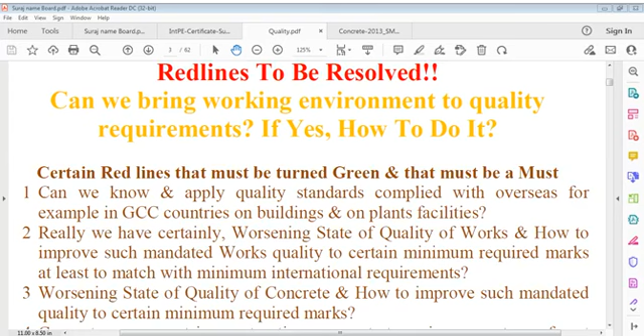And we know concrete component in constructions amounts to major percentage of cost, and therefore it becomes incumbent on us to care about quality of such component. Concrete is very costly material in comparison to other materials. Concrete is very costly, but we should not forget it is in long run very cheap.

Concrete can work up to hundreds of years and more, depending on how we do it, how we preserve it. And concrete means it is our, you can say, like a kid. If I produce concrete, I produce it for many decades. It's not today I produce, tomorrow I say it's over. It's not an electronic machine. It's not a computer. It's not another machine or some consumable that tomorrow I have to buy again and consume it.

It is concrete that shall work for me even after my death. Of course, it shall not work for me, but I am saying in my place, whoever is there, I should be there at that time, even after my death. Maybe my soul comes and sees this was my building, I did it. It is still existing. It can happen. There's another part, I'm just trying to communicate that you have to be serious about that. Concrete, only material in physical world which is longest living.

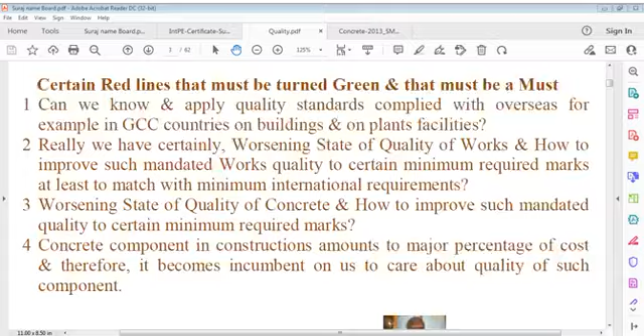So what I say, concrete component in constructions amounts to a major percentage of cost, and therefore it becomes incumbent on us to care about it out of common and professional understanding. Why do we have no seriousness in this regard? We have to invite seriousness. We have to be very serious about such an issue of concrete material,

because it is a resource. It's a manufactured resource based on available natural resources that we extract from earth, from the lithosphere. We have to consider the value of this resource.

Rock is not available just in 1 year or 2 years. Sedimentary rocks are produced in many decades. Metamorphic rocks are also produced in many decades. And igneous rocks, it's volcano. We have to respect these materials, that we use these materials for only a few decades, which have been produced based on many decades.

Just like we did not respect petroleum, we did not respect fossil fuels. We should not make this mistake with these materials.

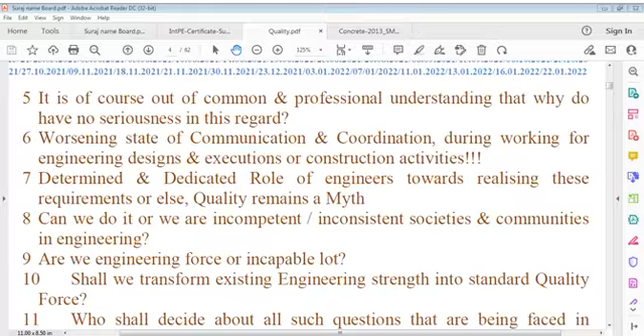I'll stop here on this talk because already 40 minutes have gone and I must have some opportunity to talk about yesterday's activity. We were talking about some concrete, and I think in addition to this document as I showed to you, this was about a nuclear power plant concrete structure, and I was on this page last time.

It was said, I just repeat that, it was NUPEC - it stands for this NRC model, which consists of a one-fourth scale model of a pre-stressed concrete containment vessel, that is PCCV, of an actual nuclear power plant in Japan, one of four units comprising.

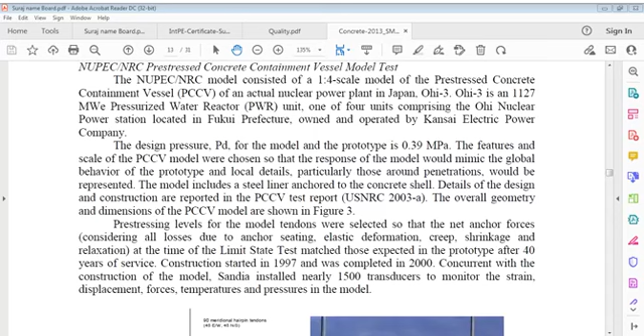Now, the design pressure for the model and for the prototype is 0.39 MPa. Features and scale of the PCCV model were chosen so that the response of the model would mimic the global behavior of the prototype, and local details, particularly those around penetrations, would be represented.

The model includes a steel liner anchored to the concrete shell. Details of design and construction are reported in the test report. Overall geometry...

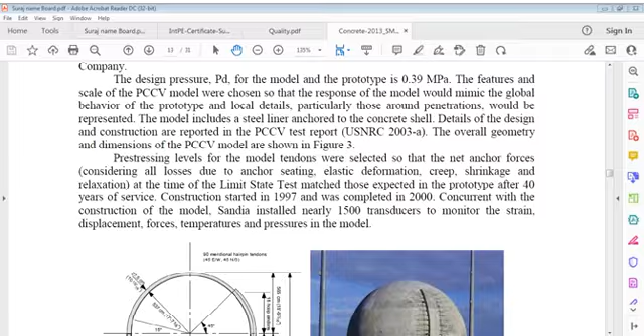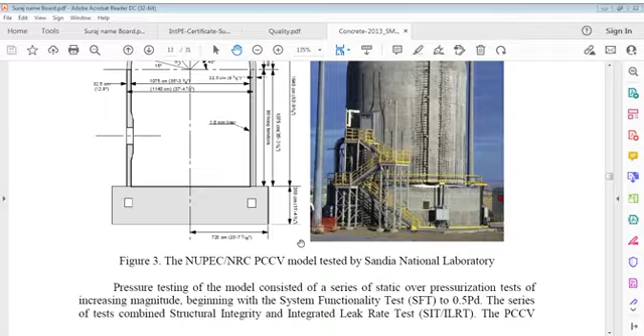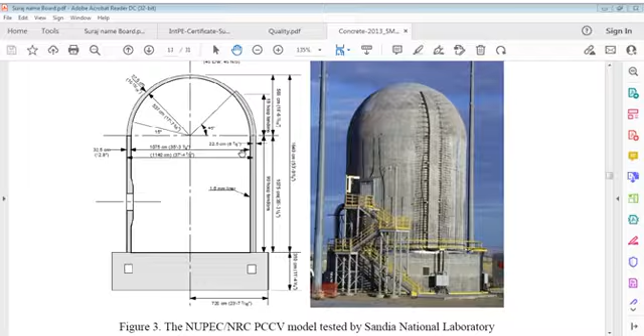It is 720 centimeters here, and 350 centimeters depth here, and it is 1640 centimeters - 16.4 meters is this vertical height, and this curve shape is 5.65 meters. Of course this is quite heavy, and the wall thickness is 325 mm. Internal diameter is 1075 centimeters, this means 10.75 meters. This is titled Models Tested by Sandia National Laboratory.

Pre-stressing levels for model tendons were selected so that net anchor forces, considering all losses due to anchor seating, elastic deformation, creep, shrinkage, and relaxation at the time of the limit state test, match those expected in the prototype after 40 years of service. Construction started in 1997 and was completed in 2000.

Concurrent with construction of the model, Sandia installed nearly 1,500 transducers to monitor strain, displacement, and forces.

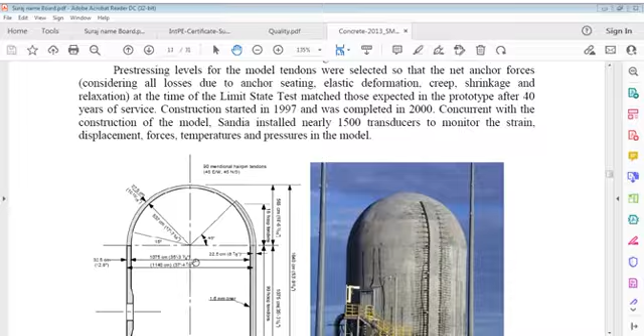Pressure testing of the model consisted of a series of static over-pressurization tests of increasing magnitude, beginning with a system functionality test to 0.5 PD, followed by a series of tests combining structural integrity and integrated leak testing.

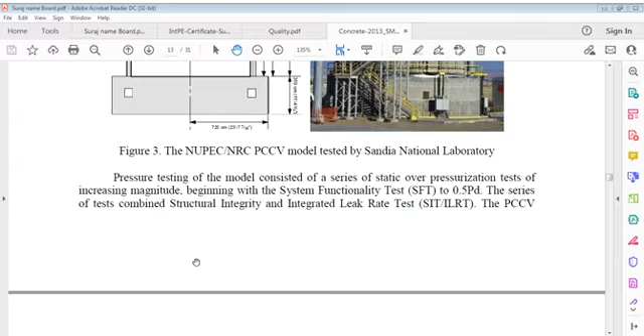The structural integrity combined test means the model was pressurized to 1.125 PD, and after holding pressure for approximately 1 hour, the model was depressurized to 0.9 PD and held at that pressure for 24 hours. During this period, a leak rate less than 0.1% mass per day was calculated, essentially demonstrating that the model was leak tight.

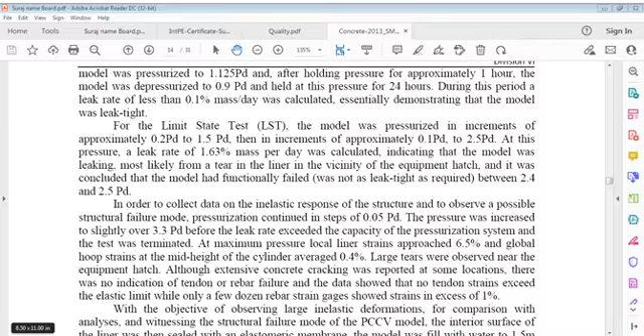For the limit state test, the model was pressurized in increments of approximately 0.2 PD up to 1.5 PD, then in increments of approximately 0.1 PD up to 2.5 PD. At this pressure, a leak rate of 1.63% mass per day was calculated.

This 1.63% mass per day leak rate indicated that the model was leaking, most likely from a tear in the liner in the vicinity of the equipment hatch. It was concluded that the model had functionally failed, not remaining as leak tight as required, between 2.4 and 2.5 PD.

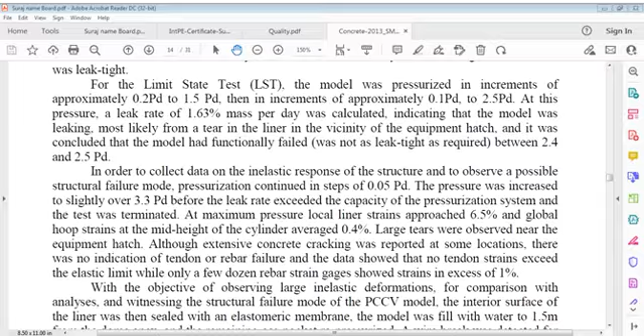In order to collect data on the inelastic response of the structure and observe a possible structural failure mode, pressurization continued in steps of 0.05 PD. Pressure was increased to slightly over 3.3 PD before the leak rate exceeded the capacity of the pressurization system and the test was terminated.

At maximum pressure, local liner strains approached 6.5%, and global hoop strains at mid-height of the cylinder averaged 0.4%. Large tears were observed near the equipment hatch.

Extensive concrete cracking was reported at some locations. There was no indication of tendon or rebar failure, and data showed that no tendon strains exceeded the elastic limit, while only a few dozen rebar strain gauges showed strains in excess of 1%.

With the objective of observing large inelastic deformations, for comparison with analysis and witnessing the structural failure mode of the PCCV model, the interior surface of the liner was then sealed with an elastomeric membrane. The model was filled with water to 1.5 meters from the dome apex and the remaining gas pocket was repressurized.

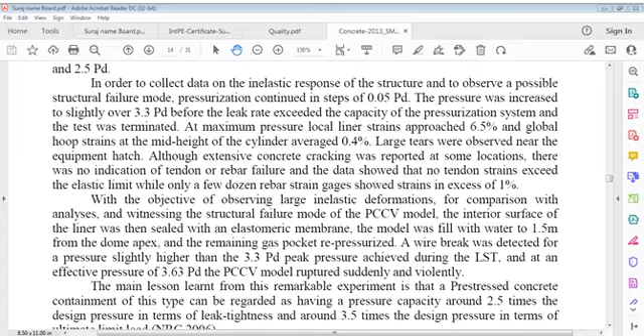The main lesson learned from this remarkable experiment is that a pre-stressed concrete containment of this type can be regarded as having a pressure capacity around 2.5 times design pressure in terms of leak tightness, and around 3.5 times design pressure in terms of ultimate limit load. This is NRC 2006.

So, as this source says, the main lesson learned from this remarkable experiment is that a pre-stressed concrete containment of this type can be regarded as having a pressure capacity around 2.5 times design pressure in terms of leak tightness, and around 3.5 times design pressure in terms of ultimate limit load.

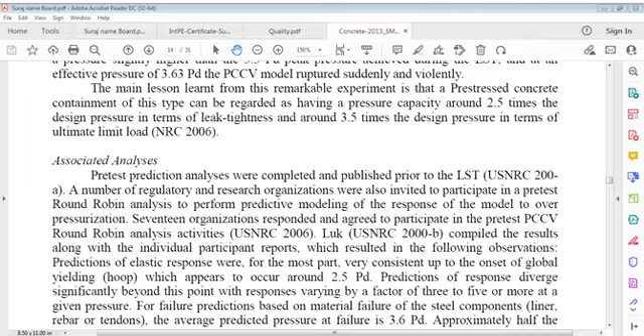This is associated with analysis. Pre-test prediction analyses were also completed and published. A number of regulatory and research organizations were invited to participate in a pre-test round robin analysis to perform predictive modeling of the response of the model to over-pressurization. 17 organizations responded and agreed to participate in this pre-test round robin analysis activity.

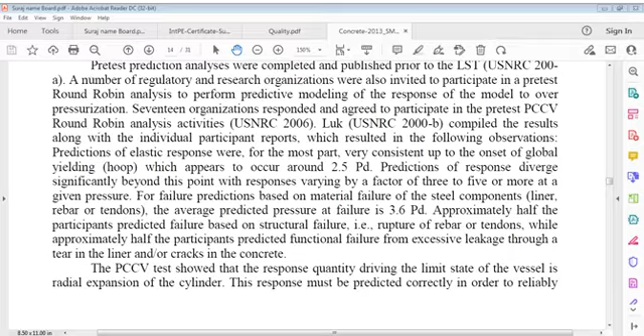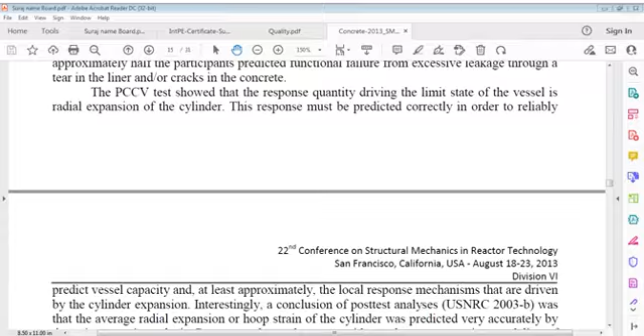The PCCV test showed that the response quantity driving the limit state of the vessel is radial expansion of the cylinder. This response must be predicted correctly in order to approximate the local response mechanisms that are driven by cylinder expansion.

Interestingly, a conclusion of the post-test analysis was that average radial expansion, or hoop strain, of the cylinder was predicted very accurately by axisymmetric analysis. Axisymmetric post-test analysis also gave evidence that appropriate modeling of tendon friction behavior is crucial.

A detailed analysis led to the conclusion that, considering both the effects of discrete cracks and elevated local strains, a liner tear could have been predicted to nearly occur as early as 2.8 PD.

One question which remained following the PCCV test was how temperature loading might have affected the results of the test. In an attempt to answer this question, the Nuclear Energy Agency of the OECD recognized it as an international standard problem and sponsored analysis toward its resolution. 11 organizations, including several participants in the pre-test round robin, participated in the ISP, the results of which are reported by this document.

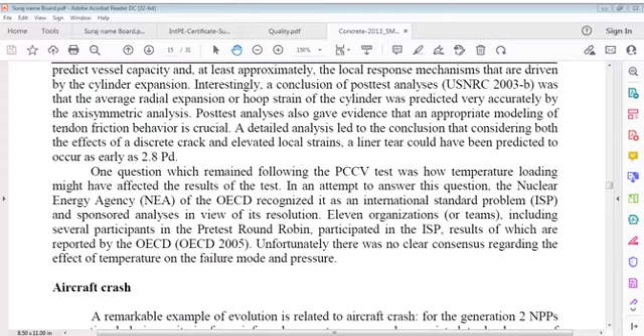Unfortunately... the round robin analysis aimed to perform modeling of the response of the model to over-pressurization. 17 organizations responded and agreed to participate, and the results, along with individual participant reports, led to the following observations.

Predictions of elastic response were for the most part very consistent up to the onset of global yielding hoop strain, which appears to occur around 2.5 PD. Predictions of response diverge significantly beyond this point, with responses varying by a factor of 3 to 5 or more at a given pressure.

For failure predictions based on material failure of steel components—liner, rebar, or tendons—the average predicted pressure at failure is 3.6 PD. Approximately half of participants predicted failure based on structural failure, rupture of rebar or tendons, while approximately half predicted functional failure.

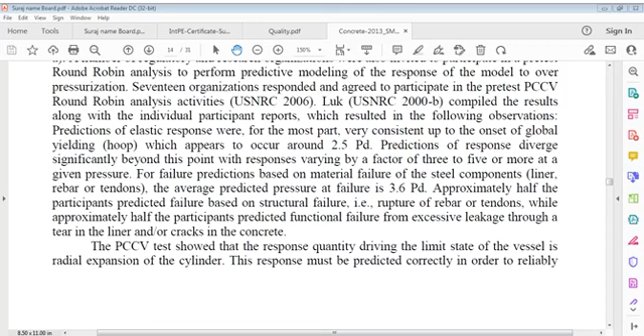A remarkable example of evolution is related to aircraft crash design for generation 2 NPPs conventional design criteria for reinforced concrete were used, associated with load cases of business or military aircraft crashes.

After the September 11, 2001 attack, it was recognized that a malevolent commercial aircraft crash should be considered in safety assessment of NPPs and taken into account in designs of NPPs to be built in future. However, it is also recognized that when dealing with extreme loads such as generated by commercial aircraft crashes, more realistic criteria should be taken into account according to ultimate capacities.

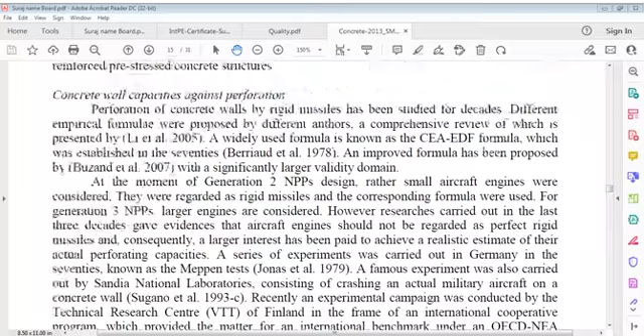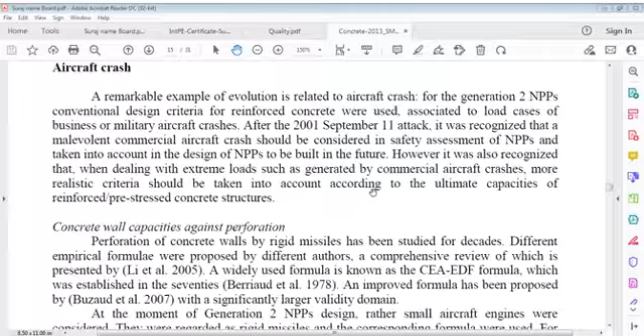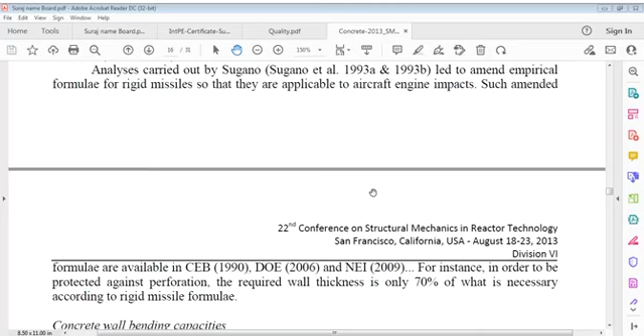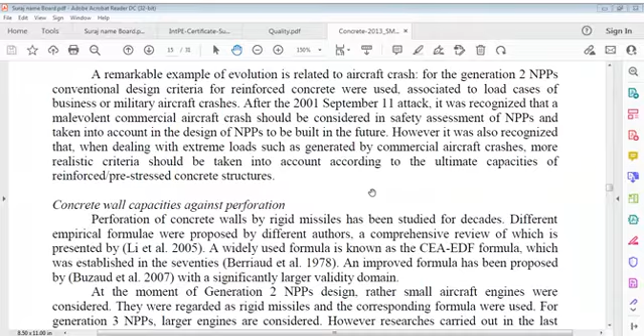Let us go on. I think I missed it. This is the... let me see, just in the piece. It's gone somewhere here. I think it's stuck somewhere. Generation 2 NPPs, this was also done.

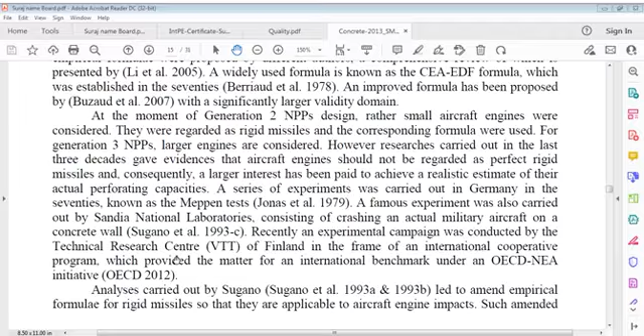Concrete wall capacities against perforation: formulas established in this range have been proposed, and generation 2 is also considered here. This recent cooperative program provided material for an international benchmark. Analysis carried out by Sugano led to amended empirical formulas for rigid missiles.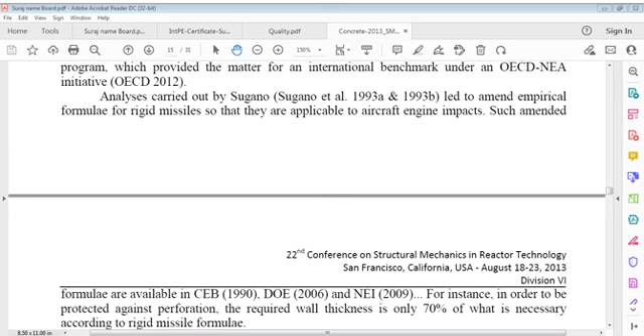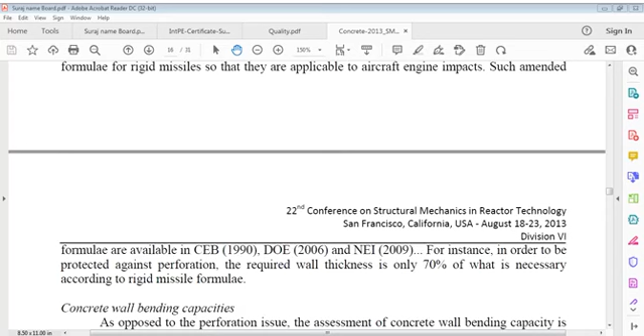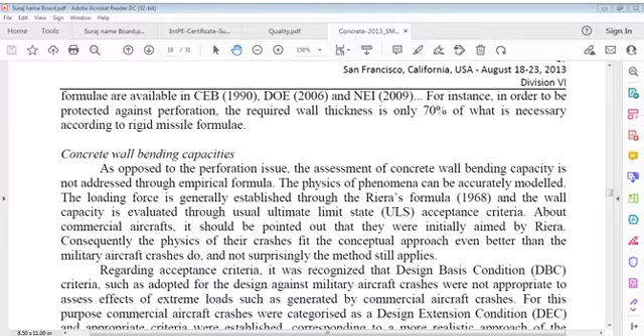Analysis carried out by Sugano led to amended empirical formulas for rigid missiles so that they are applicable to aircraft engine impacts. Such amended formulas are available, and for instance, in order to be protected against perforation, the required wall thickness is only 70% of what is necessary according to the rigid missile formula.

Concrete wall bending capacity: as opposed to the perforation issue, assessment of concrete wall bending capacity is not addressed through empirical formula. The physics of the phenomena can be accurately modeled. Loading force is generally established through Riera's formula, and wall capacity is evaluated through usual ultimate limit state acceptance criteria.

About commercial aircraft, it should be pointed out that they were initially aimed at by Riera. Consequently, the physics of their crashes follows a conceptual approach even better than military aircraft crashes do, and not surprisingly, the method still applies.

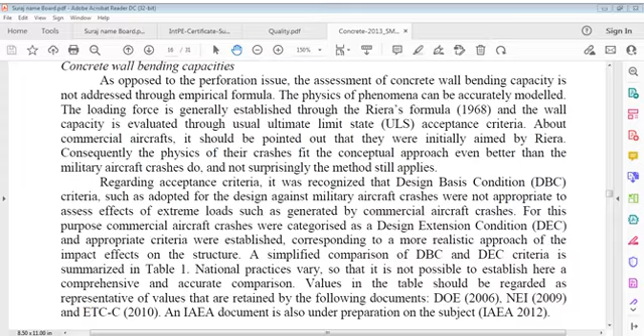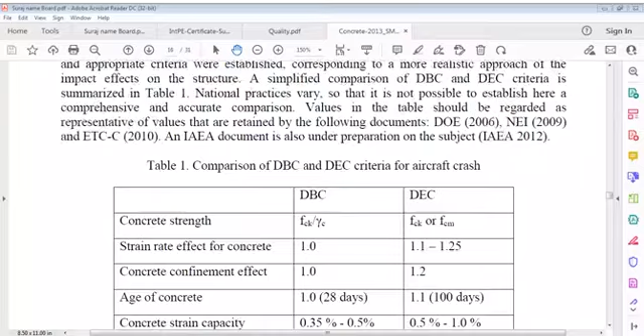A simplified comparison of DBC and DEC criteria is summarized. National practices vary, so it is not possible to establish here a comprehensive and accurate comparison. Values in this table should be regarded as representative of values retained by certain reference documents. This is a comparison of DBC and DEC criteria for aircraft crash, where DBC is design basis condition and DEC is design extension condition.

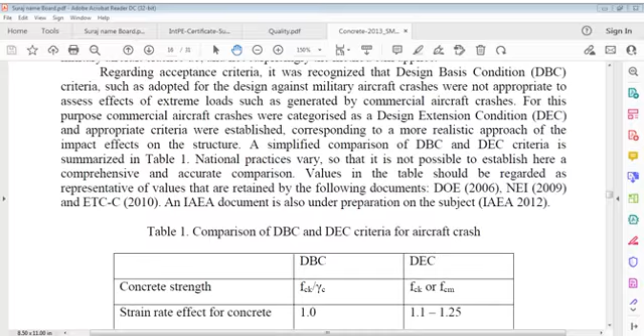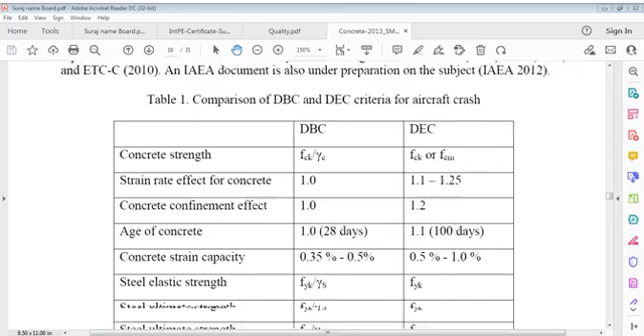Design basis condition and design extension condition. We have various parameters here, and we are comparing this between DBC and DEC.

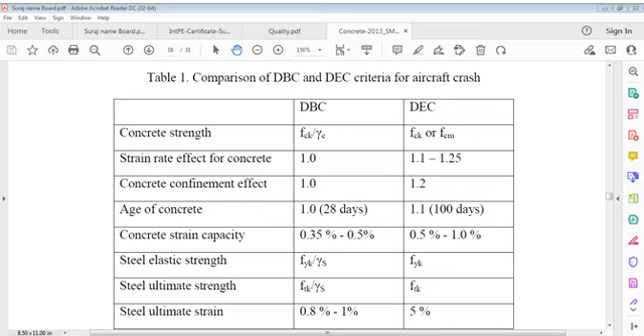Concrete strength, strain rate effect for concrete, confinement effect, age of concrete, strain capacity, steel elastic strength, steel ultimate strength, steel ultimate strain.

Concrete strength in basic criteria is for military, and extension is for commercial. So this is concrete strength, FCK over gamma C 1. You can say it is concrete strength FCK over gamma C, and here is FCK or FCM.

Strain rate effect for concrete is 1, and in other case is 1.1 or 1.25.

Concrete confinement effect is 1, here is 1.2, that is for commercial aircraft. Age of concrete 28 days in this case, and this 1, and 1.1 is 100 days.

Concrete strain capacity in first case is 0.35% to 0.5%, in other cases 5% to 1%.

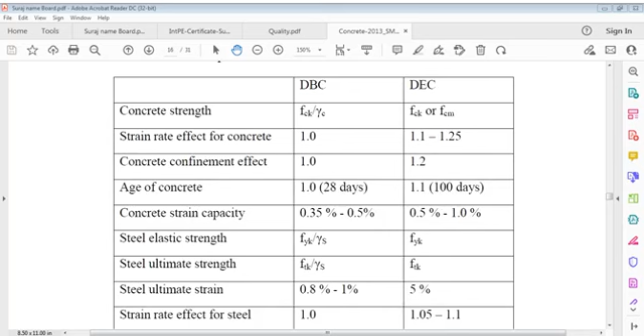Steel elastic strength, steel ultimate strength, and then steel ultimate strain 0.8% to 1%, other cases 5%.

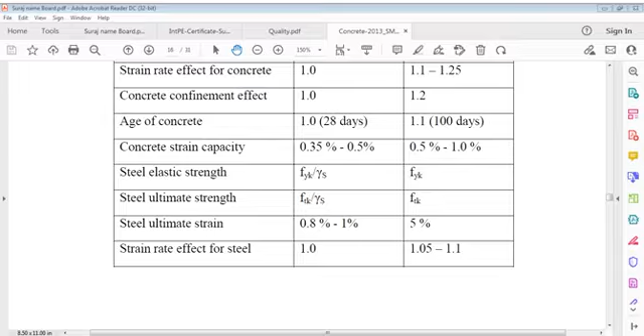Both military and commercial aircraft crashes result in in-structure induced vibration, which should be accounted for in safety assessments.

Frequency content of dynamic load, we have to account for in safety assessment. Frequency content of dynamic load by crash is still an open issue.

Refined modeling of aircraft structure crash indicates that high frequency content ignored by the Riera's approach should be taken into account in the load function. It doesn't mean that an additional input should be added on top of Riera's load curve, but that this load curve should not be as smooth as it appears.

High frequency content of loading force and corresponding wave propagation in concrete structures, in particular energy dissipation along the wave path, are matters of research for coming time.

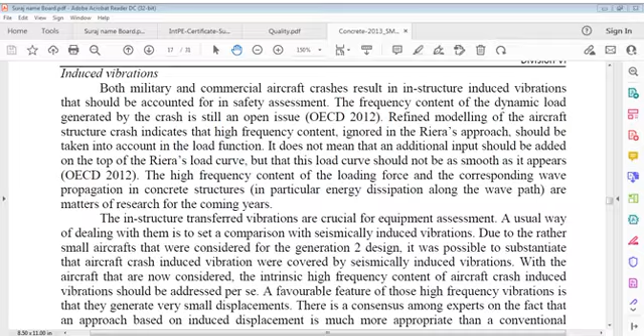In-structure transferred vibrations are crucial for equipment assessment. A usual way of dealing with them is to set a comparison with seismically induced vibrations due to rather small aircrafts that were considered for generation 2 design.

It was possible to substantiate that aircraft crash induced vibration were covered by seismically induced vibration. With aircraft that are now considered, the intrinsic high frequency content of aircraft crash induced vibration should be addressed per se.

A favorable feature of those high frequency vibrations is that they generate very small displacements.

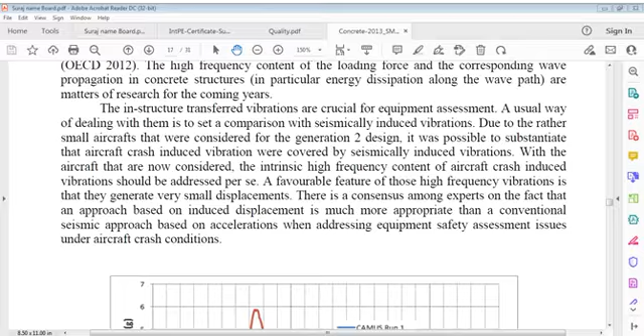There is a consensus among experts on the fact that an approach based on induced displacement is much more appropriate than a conventional seismic approach based on accelerations when addressing the equipment safety assessment issue under aircraft crash conditions.

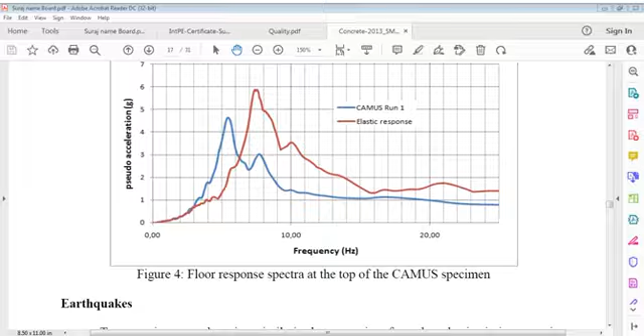A floor response spectra at top of CAMUS specimen, frequency this way, pseudo acceleration. So earthquakes now, to a certain extent, there's similarity between aircraft crash and seismic input motion issues.

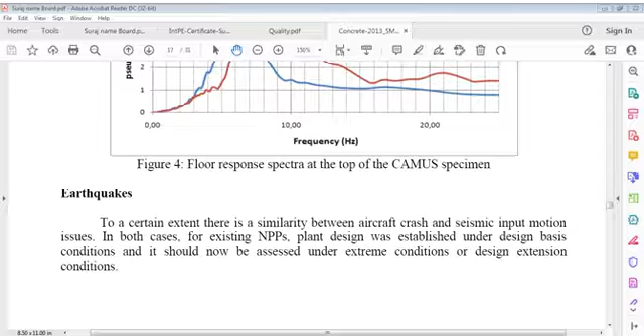In both cases, for existing NPPs, plant design was established under design basis conditions, and it should now be assessed under extreme conditions or design extension conditions.

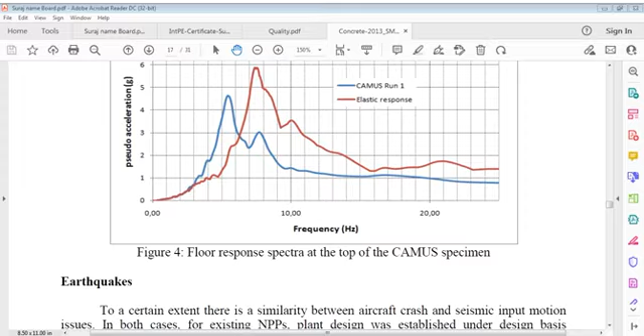Experience and experimental feedback.

Several cases of seismic motions that approach or exceed the design basis earthquake were reported before Fukushima in Japan, and to a lesser extent in the US.

As a matter of fact, the more challenging seismic input motion recorded in an NPP at the occasion of the Great East Japan earthquake was not at Fukushima but at Onagawa, much closer to the epicenter than Fukushima.

Feedback of experience of these events is that NPP concrete structures are actually very robust against seismic input motions. This is due to the fact that nuclear industry design criteria encompass large margins, resulting in the fact that when designed for a given input motion, NPP concrete structures are capable to sustain at least 3 to 4 times this design input motion without significant damage.

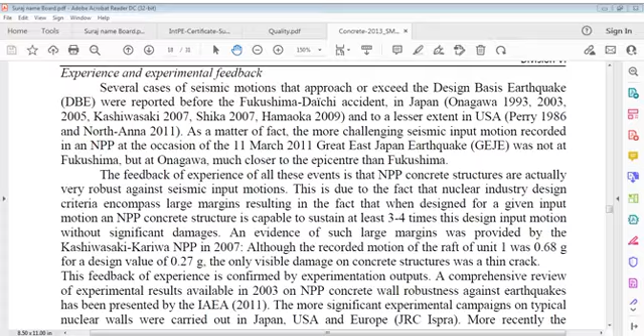This feedback of experience is confirmed by experimental outputs. A comprehensive review of experimental results available in 2003 on NPP concrete robustness against earthquake has been presented by IAEA. A more significant experimental campaign on typical nuclear walls was carried out in Japan, USA and Europe.

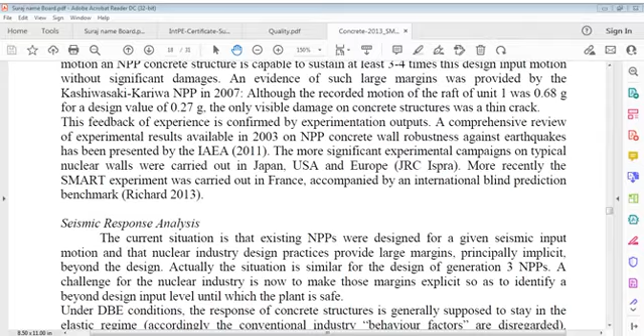More recently, the SMART experiment was carried out in France and accompanied by an international blind prediction benchmark regarding seismic response analysis.

Seismic response analysis.

Current situation is that existing NPPs were designed for a given seismic input motion, and nuclear industry design practices provide large margins, principally implicit, beyond design. This situation is similar for design of generation 3 NPPs. A challenge for the nuclear industry is now to make those margins explicit so as to identify a beyond-design input level until which the plant is safe.

Design DBE. Under DBE conditions, response of concrete structures is generally supposed to stay in the elastic regime. Accordingly, conventional industry behavior factors are disregarded, although associated criteria are those of an ultimate limit state compatible with cracking and even rebar yielding.

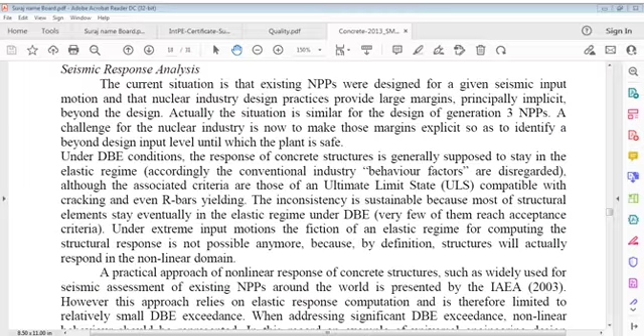This inconsistency is sustainable because most structural elements stay eventually in the elastic regime under DBE. Very few of them reach acceptance criteria. Under extreme input motions, the assumption of an elastic regime for computing structural response is not possible anymore, because by definition structures...

A practical approach of non-linear response of concrete structures, as widely used for seismic assessment of existing NPPs around the world, is presented by IAEA 2003. However, this approach relies on elastic response computation and is therefore limited to relatively small DBE exceedance. When addressing significant DBE exceedance, non-linear behavior should be represented.

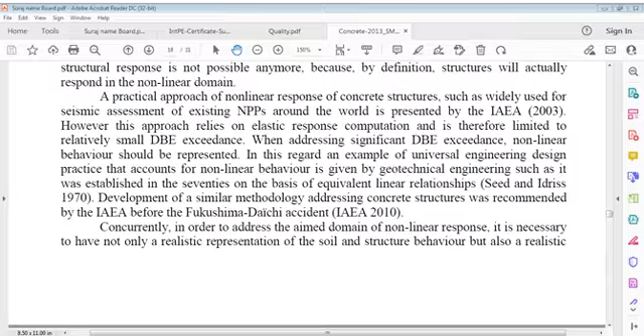In this regard, an example of universal engineering design practice that accounts for non-linear behavior is given by geotechnical engineering, such as was established in the 70s on the basis of equivalent linear relationships. Development of a similar methodology addressing concrete structures was recommended by IAEA before the Fukushima-Daïchi accident. Concurrently, in order to address an extended domain of nonlinear response, it is necessary to have not only a realistic representation of soil and structural behavior, but also of seismic input motion.

Description of seismic input motion. It means that conventional design response spectra, such as NRC 1973, EUR 2012, or Eurocode 2005 spectra, which provide appropriate loads for design purposes, are not appropriate for dealing with extreme events for several reasons.

On soil sites, site response is controlled by soil behavior. Consequently, due to nonlinear soil response, the spectrum shape of input motion is dependent on the seismic input level.

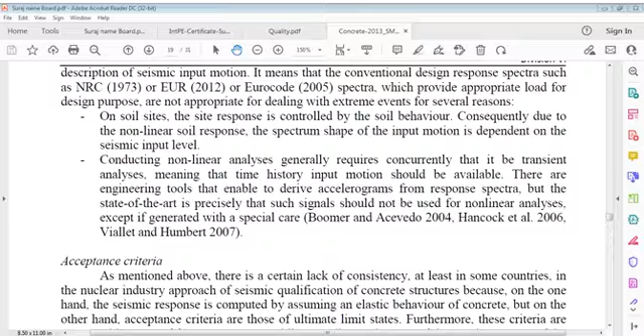As mentioned above, there exists a certain lack of consistency, at least in some countries, in the nuclear industry approach to seismic qualification of concrete structures, because on one hand seismic response is computed by assuming an elastic behavior of concrete, but on the other hand acceptance criteria are those of ultimate limit states. Furthermore, these criteria are expressed in terms of forces or stresses, while according to the state of the art, the purpose of evaluation of seismic capacity should be to analyze strains.

Induced by the postulated input motion, and to compare them with ultimate acceptable strains. Basically, as pointed out by IAEA 2003, this means that approaches oriented to strain evaluation, the displacements approach, are more relevant than those based on stress evaluation, the forces approach.

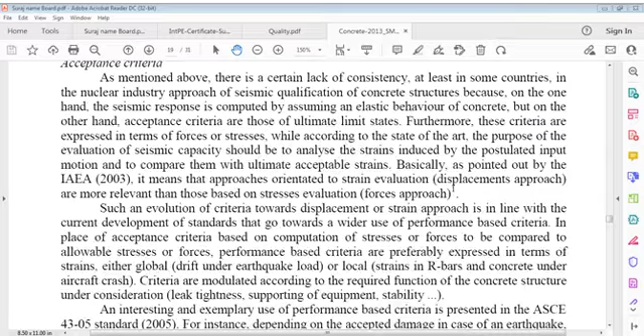An interesting and exemplary use of performance-based criteria is presented in ASCE 43-05 Standard, 2005. For instance, depending on accepted damage in case of an earthquake, acceptable drift for a concrete moment-resistant frame varies from 0.5%, essentially elastic, to 2.5%, stable short of collapse.

A 0.5% drift associated with essentially elastic behavior of the structure draws attention, because for such a drift, forces computed on the basis of an elastic response exceed acceptable forces according to conventional criteria. It reveals once again that ignoring cracking effects that occur even at low levels of input motion is not realistic.

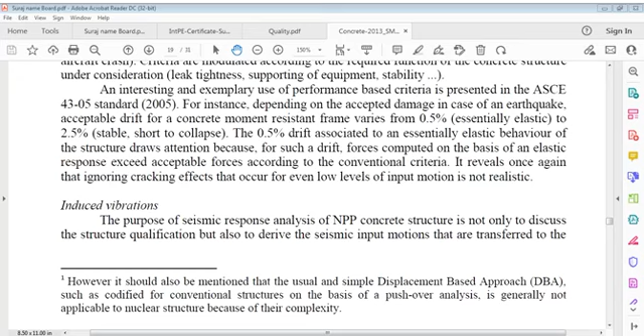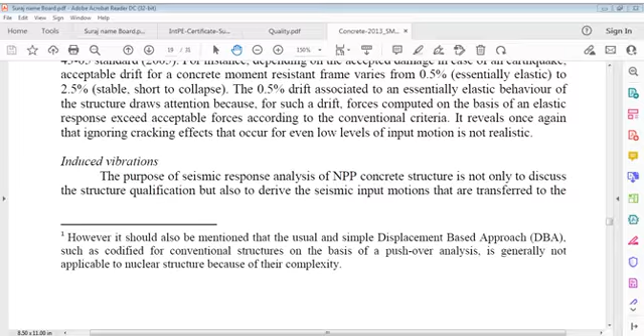Induced vibration. The purpose of seismic response analysis of NPP concrete structures is not only to discuss structure qualification but also to derive seismic input motions that are transferred to equipment. This transferred motion is generally represented in the form of floor response spectra.

As pointed out by IAEA 2010, a key point with floor response spectra is that they are very sensitive to small structural non-linearity. IAEA's conclusion is that even for input motions that do not exceed DBE, nonlinear effects related to micro-cracking or cracking of concrete structures should be taken into account for FRS generation. An illustration of this effect is provided by the outputs of the CAMUS experiment carried out in France on a CEA shaking table in the 90s, and extensively discussed on the occasion of an international benchmark raised by IAEA.

During the first run of the experimental campaign under an input motion of 0.24 g, which did not exceed the acceptable input level according to nuclear practice of 0.27 g, a significant frequency shift towards lower frequencies was observed.

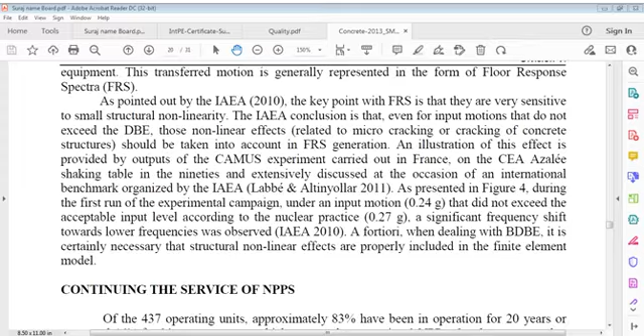Of 437 operating units, approximately 83% have been in operation for 20 years or more and 46% for 30 years or more, which are mostly Generation 2. One key concern that could affect continued operation and development of nuclear power relates to the impact of aging on plant performance.

Unlike mechanical components or electrical equipment that can be replaced, concrete civil structures either cannot be replaced or would be very difficult to replace. As noted previously in this paper, NPP concrete structures are designed, built, and operated to standards that aim to reduce the likelihood of release of radioactive materials to levels as low as reasonably achievable.

The NPP, however, involves complex engineering structures, sometimes operating in demanding environments that potentially could challenge the high level of safety, that is, the safety margins required of the plant throughout its service life.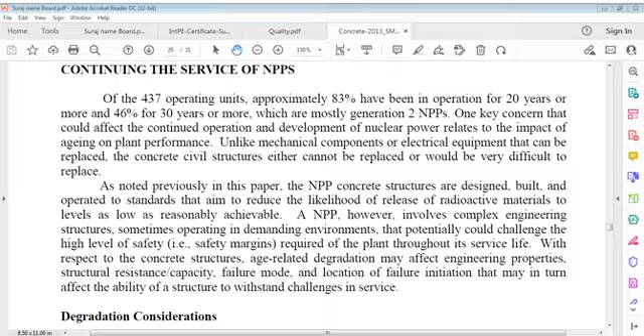When a concrete structure degrades, it is a function of many factors, including constituent materials, location—meaning it may be coastal or inland—climatic condition, temperature, moisture, and presence of external agents such as aggressive ionic species.

NPP concrete structures are composed of several constituents: concrete, mild steels, reinforcing rebar, and pre-stressing systems that, in concert, perform multiple functions: foundation, support, containment, and shielding.

Some concrete structures, such as the spent fuel pool and containment, can also include a metallic or polymer liner to provide leak tightness or a pressure boundary.

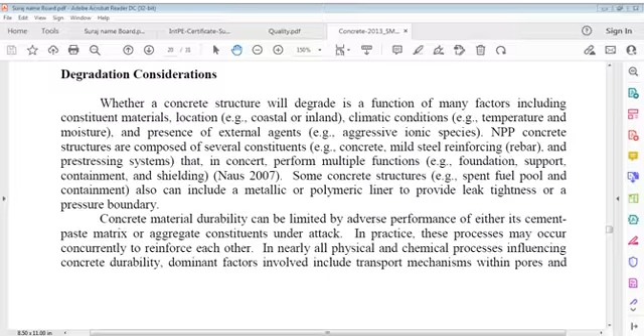Physical attack mechanisms involve degradation of concrete due to external influences, and generally involve cracking due to exceeding concrete tensile strength, or loss of surface materials: salt crystallization, freezing and thawing, thermal expansion, thermal cycling, abrasion, erosion, cavitation, irradiation, fatigue or vibration, biological attack, and differential settlement.

So there are many properties in question here. To repeat: physical attack mechanisms involve degradation of concrete due to external influences, generally involving cracking from exceeding concrete tensile strength, or a loss of surface material—namely salt crystallization, freezing and thawing, thermal expansion, thermal cycling, abrasion, erosion, cavitation, irradiation, fatigue or vibration, biological attack, and differential settlement.

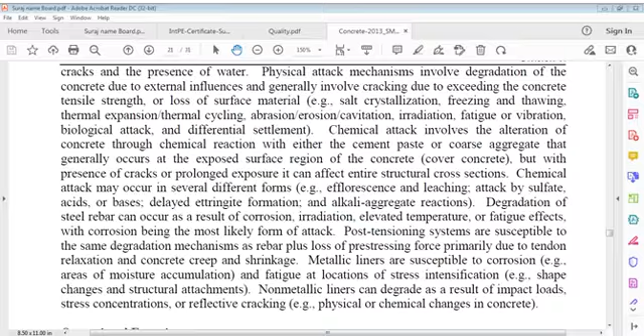Operational experience: in general, the performance of NPP concrete structures has been very good.

However, several of these structures have experienced degradation that has required remedial action. Initially, many problems identified occurred early in life, were addressed at that time, and were related to errors in material selection, design or construction—cracking of pre-stressing anchor heads due to stress corrosion cracking, containment dome delamination due to design and material deficiencies, low concrete compressive strength, excessive voids or honeycombing in concrete, and misplaced rebars.

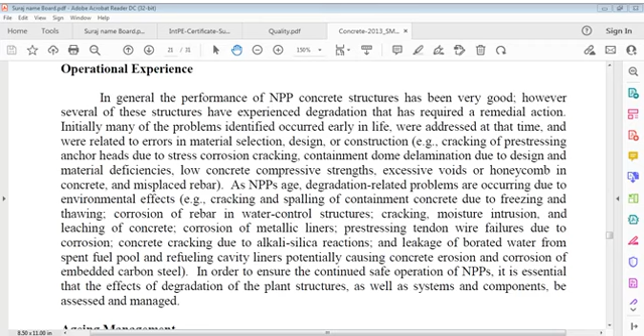Operating experience has demonstrated that periodic inspection, maintenance, and repair are essential elements of an overall program to maintain an acceptable level of reliability over the service life of NPP concrete structures.

Knowledge gained from conduct of an in-service condition assessment can serve as a baseline for evaluating the safety significance of whatever degradation may be present, and for defining subsequent in-service inspection programs.

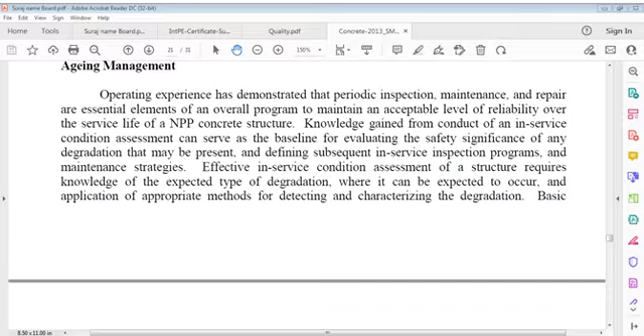Review of as-built drawings and other information pertaining to original design and construction, so that information such as accessibility, position, and orientation of embedded rebar and plates in concrete is known prior to the site visit.

Second, detailed visual examination of the structure, to document easily obtainable information on instances that can result from or lead to structural distress.

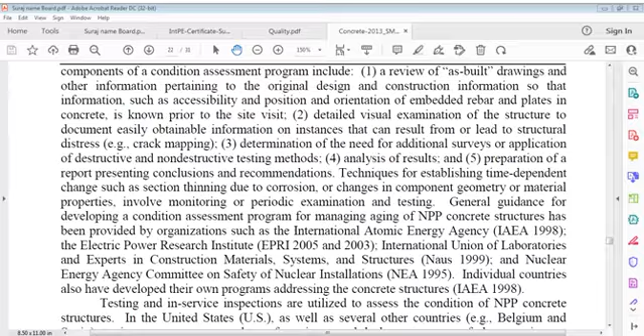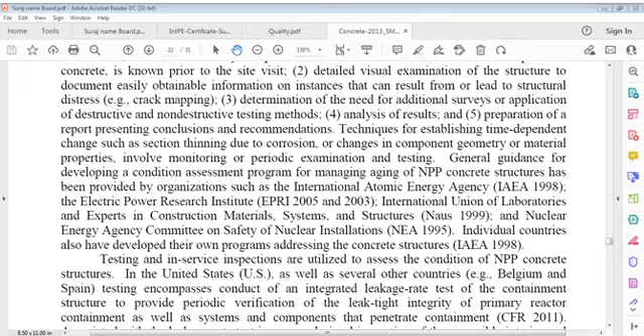Testing and inspection of structures: in the US, as well as several other countries such as Belgium and Spain, testing encompasses conduct of an integrated leakage rate test of the containment structure to provide periodic verification of the leak-tight integrity of the primary reactor containment, as well as systems and components that penetrate containment.

Associated with the leakage rate test is a general visual inspection of accessible interior and external surfaces of containment structures and components to uncover any evidence of structural deterioration.

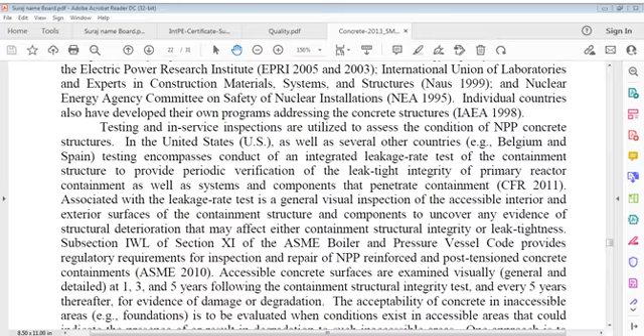Accessible concrete surfaces are examined. So it says that may affect either containment structural integrity or leak tightness. Subsection IWL of Section 11 of the ASME Boiler and Pressure Vessel Code provides regulatory requirements for inspection and repair of NPP reinforced and post-tensioned concrete containments. Accessible concrete surfaces are examined visually, generally and in detail, at 1, 3, and 5 years following the containment structural integrity test, and every 5 years thereafter, for evidence of damage or degradation.

Acceptability of concrete in inaccessible areas. Inaccessible areas, namely foundations, are to be evaluated when conditions exist in accessible areas that could indicate presence of, or result in, degradation to such inaccessible areas. One approach is to sample groundwater adjacent to the structure of interest, namely for pH and chloride and sulfate ion concentrations.